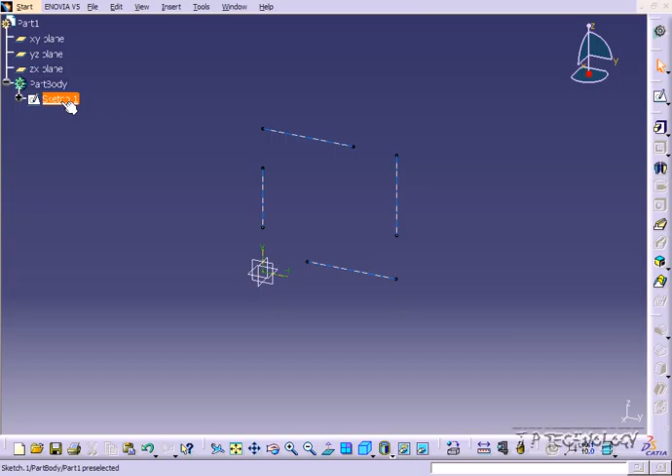Once you have it loaded, let's go into the sketch. Double click on the sketch, and now we're into it. What we're going to do in this tutorial is go through the trim extend features within CATIA V5. These are the trim features you're able to choose from—you can delete an entire section or break it, it's up to you. The tool I'm going to specifically focus on in this tutorial is the trim.

What I've done here is set up some lines, and we're going to trim and extend these lines to make a square. To start off, let's click on the trim. To use the trim, you click on a line, and then move it, and it's going to move one of the points up and down until it touches. I'll show you—let's trim this line and make it touch that line there.

Let's click this line, and you can see that we're now able to move it up or down. We want it to go to that point there. To make it go just at that one point, we're going to highlight this line here. Now it's in line with it. Click, and now it's in line.

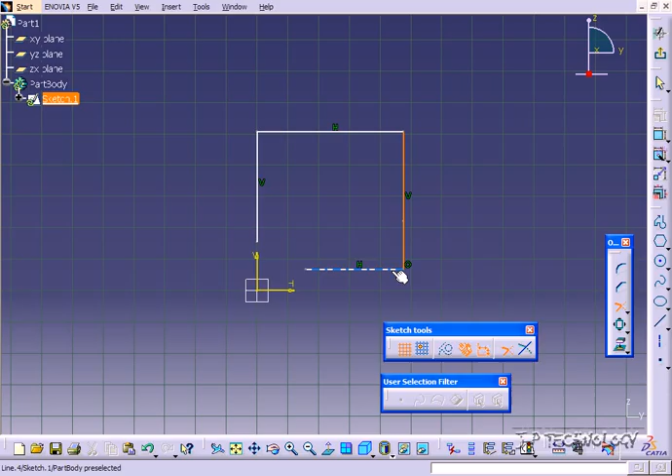Now let's keep going around and finish the square. We'll make this in line with that. Make this one in line with this one. And let's make this one in line with that one there. And now we've made our square.

Being able to trim different edges and whatnot is a very powerful tool in here. You're able to piece together sketches and then trim and extend everything until they complete a whole profile. So I'm going to show you another one.

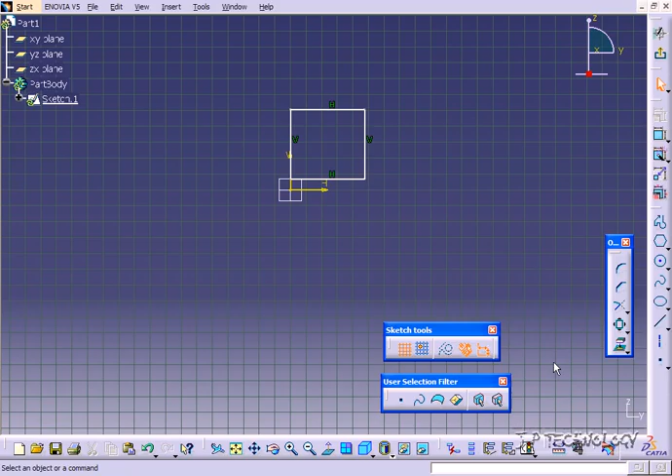I'm going to make a few lines, and we're going to make a triangle. What we're going to do in this one is trim them. In the last one we extended everything; this one we're going to trim the edges.

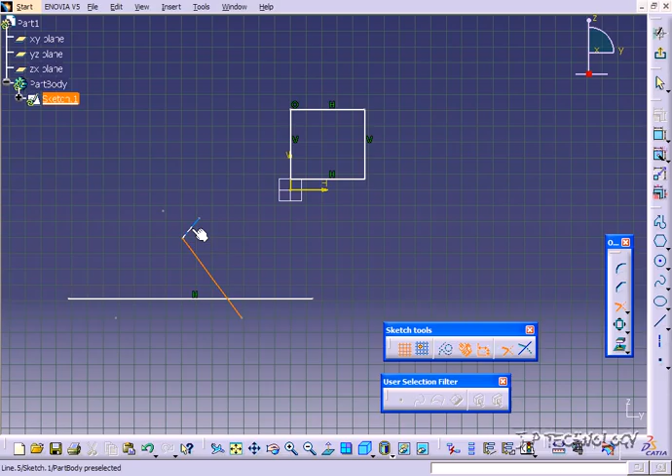Let's click trim, and what you have to do is click on the side that you want to keep. In this case we want to delete this side, and we want to keep this side. Let's click right here and bring it up to that line. As you can see, it's deleting that other line there, so you're going to have to move it around until you get the result you want. We want both of those at the top to be gone, so bring it to the side there, and now we've got both. Now let's do the same to the bottom.

Let's keep this side here, and we'll trim this one here too. And now we've got our triangle.

Now let's take the circle and put it on the top of the triangle here. Let's just pull it out just a bit. Now let's try to trim some of these edges so that we have just a single profile.

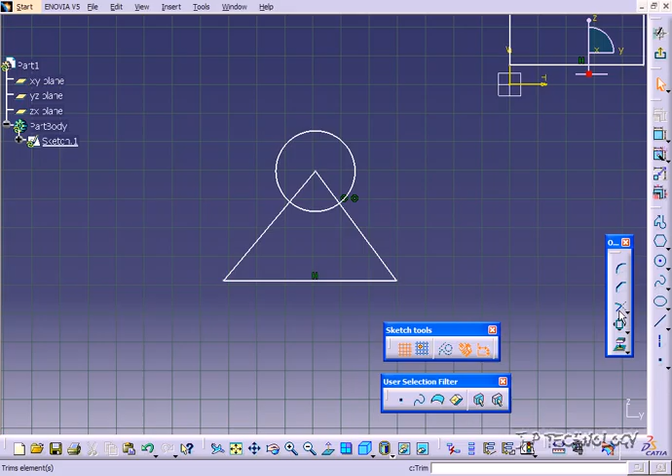Let's click trim. We want to keep this side, so we'll pull it up to there. We'll do the same to this here, bringing it around until it touches there. And now we've trimmed those sides.

Now this is a great tool, as you're able to piece those together and make the profile. If I wanted to do this independently, I would have to do a 3-point arc, slowly building all these together. With the trim, you're able to throw all the objects in there and then start trimming away the excess. So the trim tool is a very, very powerful tool.

The more you play around with it, the more you'll know. You just have to use it to learn and to know when to use it. It's a great tool, and it'll help you put sketches together quicker, easier, and get the results that you want.

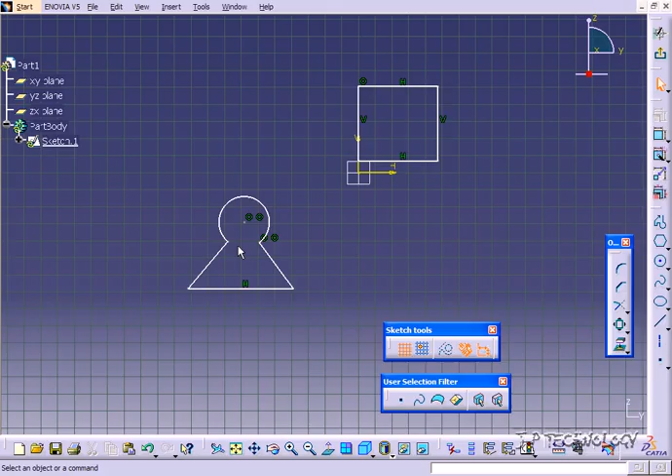And this concludes our tutorial on how to use the Trim Extend sketch feature within CATIA V5.